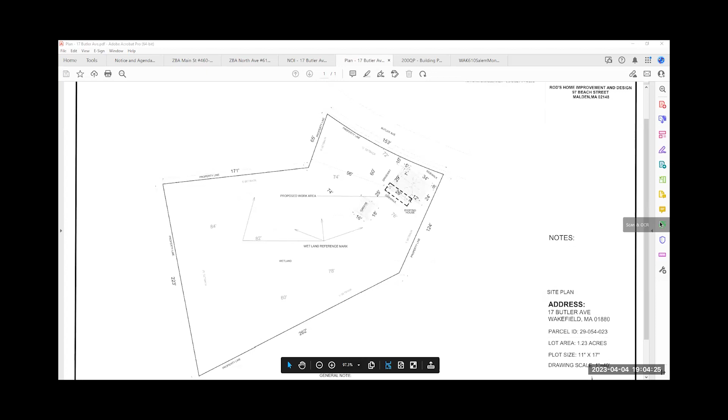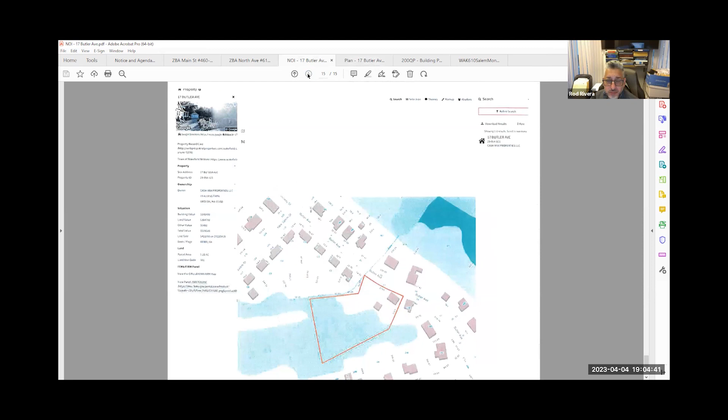It's 7 o'clock right now. I got it on now. That's actually the site plan, not the plans. Those are the pictures. These are all I had. Yeah, those are all that were attached to the application. And I know we noted that none of the plans show the wetlands or the buffer zone.

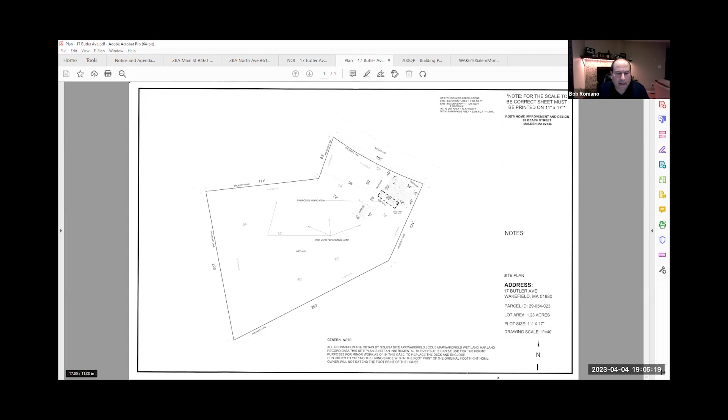All right, yeah, there is a note from Rebecca. The wetlands have not been confirmed by Elaine yet, so it certainly will need to be continued until she can get out there and verify wetlands. Have the wetlands been flagged? No. And they're not shown on the plan either. Okay, I know it's hard to see on that site plan, but I could print out better line weight to show the wetlands.

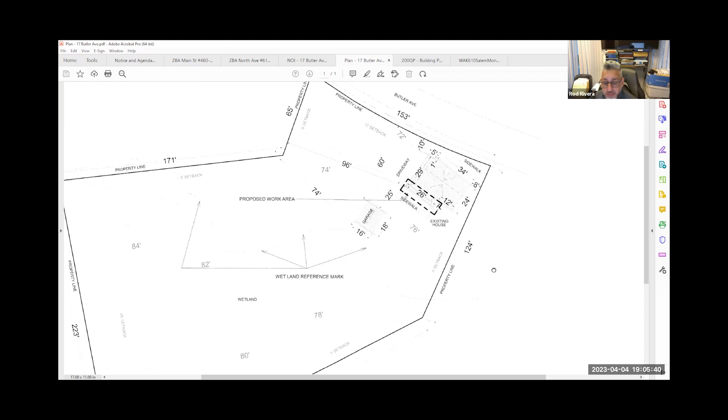Is it on this plan? So anything on the arrow, the longest arrow that looks like a fork, that area right there shows the references. All right, so there's no flags on the property itself, though? No, not right now. Yeah, it's very faint.

So what are you drawing in green? What is the green line? It looks like Ken's tracing the line. The 100 foot? You know, I'm going to tell you, as a minimum, we need to have the resource areas shown on the plan.

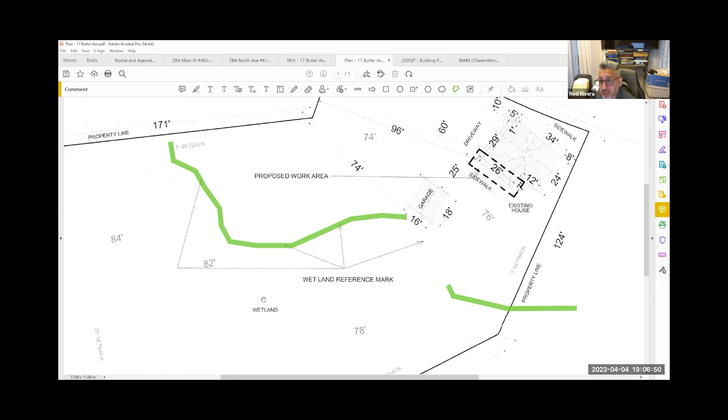I mean, for some reason that PDF file did not show it. If you could even see, the ones I have in person are darker in line weight. But they need to be delineated and certified by someone that's registered to do that type of stuff.

Are you saying the whole other side of the green line is wetland? Yes, anything behind that—where it says wetland down there in the corner, yes, on the bottom, yes.

Am I understanding that you're really not adding anything on, you're staying within the footprint of the house? Yeah, wherever the existing porch was, because it fell apart and rotted so bad that the roof collapsed and damaged the bottom deck. So we decided to just enclose that, rebuild it with the permit, and make it part of the living room inside the house.

Okay, so when you rebuild it, do you have to do anything to the foundation that was there? Unfortunately, anytime you take anything on, it's my responsibility to make sure it's secure and safe, so I'd rather just do the footings.

And the footings in that area will be 4 feet below the frost line. I'm not going any further than that, and it's going to stick out about 6 inches above the ground level.

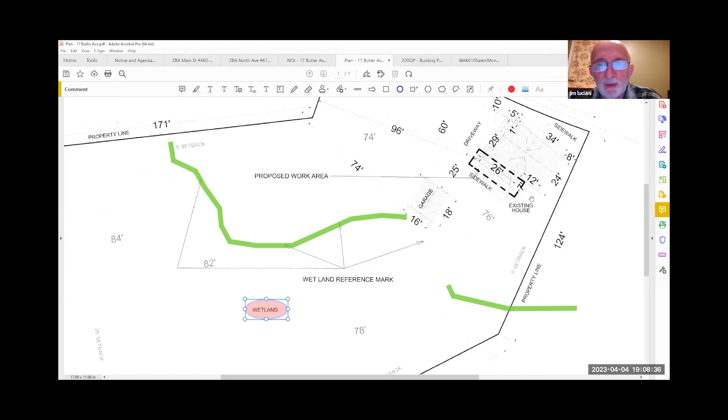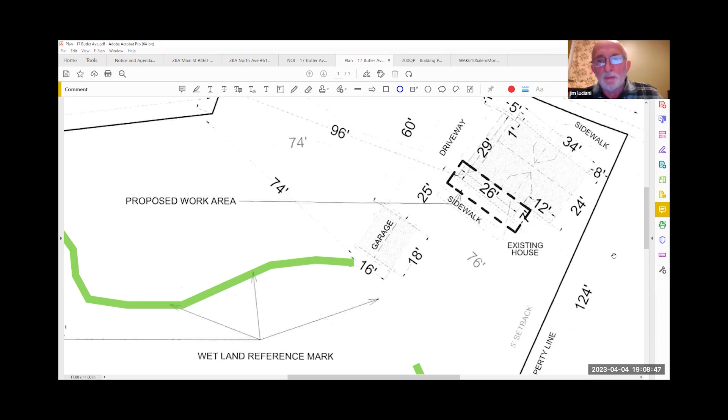The point I'm trying to get at is, potentially if you're staying within the footprint of the existing house, it seems like we should be able to permit something like that without going through a lot of hassle. I would appreciate that, because this house is costing a lot of money to maintain in terms of permitting and carrying costs of the property. We had other ideas, but things didn't work out, so we just want to enclose that area and make it look pretty and finish it inside.

We do have permits for the inside, and about 80% of it is done, except the plumbing and electrical still need some tweaking here and there. We just want to be able to move forward with this and close it and install siding and finish it up.

So is that shaded? Can we just back up for a second? So the only work on the outside you're proposing is replacing the porch - does that impact the footprint in any way? Correct, it's the same exact footprint, other than we're just going to enclose it, so it'll be part of the inside of the living quarters.

Let me ask you this - can you enclose it by putting down piers, or are you putting a foundation wall, or individual piers? Piers. Well if that's all you're doing, really, I don't have a problem myself with allowing that work.

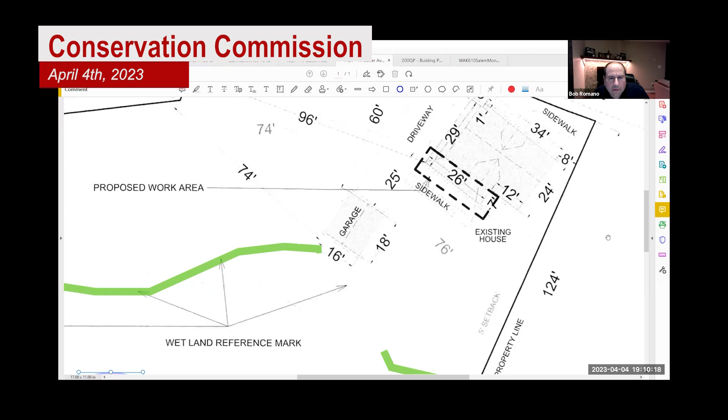So on this drawing, where is the porch? Is it facing the sidewalk? Is that a hatched area right now? That dashed line, that would be the driveway side. The front is actually on the top of the page.

Is what says proposed work area actually the proposed work area? Yes, the dotted line there is the area that we're going to be working on.

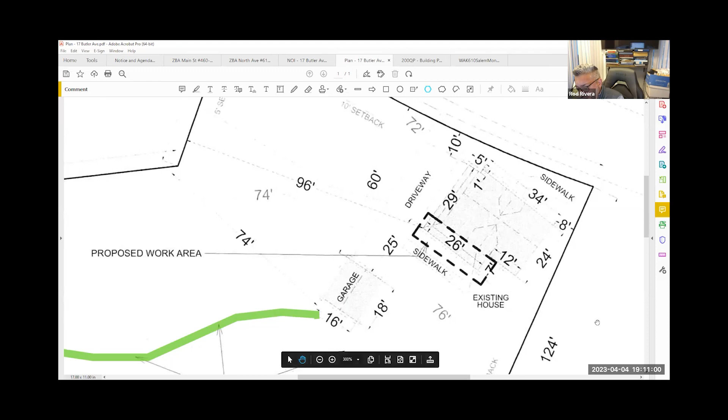Is this close enough to the wetland to actually be in our jurisdiction? Yes, in the buffer - it's got to be within our jurisdiction. I believe they said it had to be 100 feet, and when she scaled it, it was like 50 feet or so.

Ken, can you zoom out a bit - I want to see what Butler Ave is? Okay, top, got it.

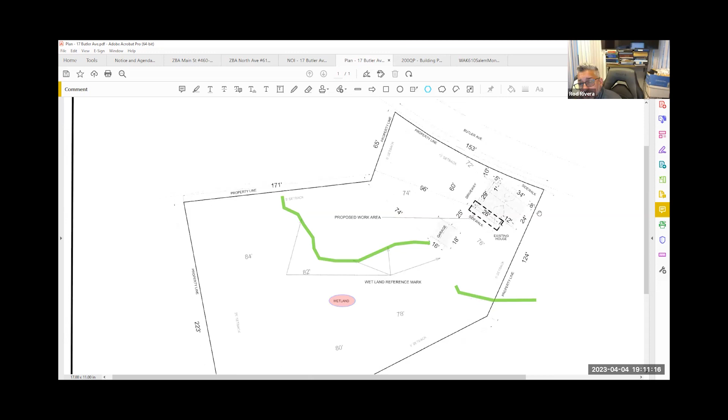So anything in the back is actually the back of the property.

And you're not doing anything to the garage that's there or anything like that, right? That's getting kind of close. So the building department just wants us to clean it up - they're asking to look at it, not mess with it, not increase it, don't do anything else, but give it a little TLC, because it is in bad shape, but it's not, to us, worth it to build a new one.

And you're not changing the grading around the yard or anything, right? Not at all, no.

And this, you filed for this, right? I did, and that's what triggered us coming to you guys, because the building commissioner, who I know very well, said that if we were inside the house it's one thing, but because we're going outside and doing new piers, then we have to go in front of the board for that. Who told you that, Benny? Benjamin, the building inspector, yes, okay.

So we don't have a number for this or anything? No, right, there's no file number yet, so he's going to have to wait for that anyways.

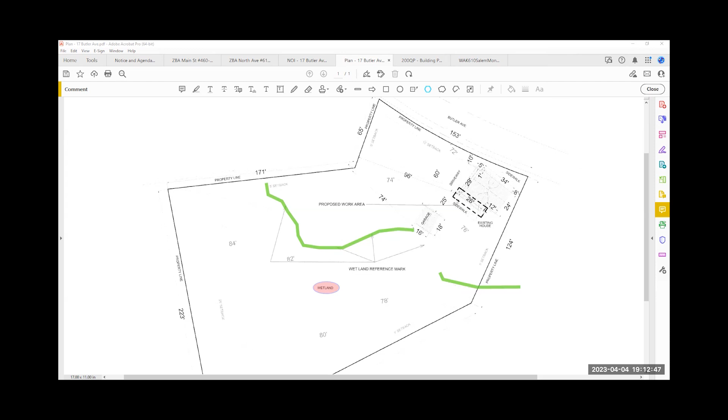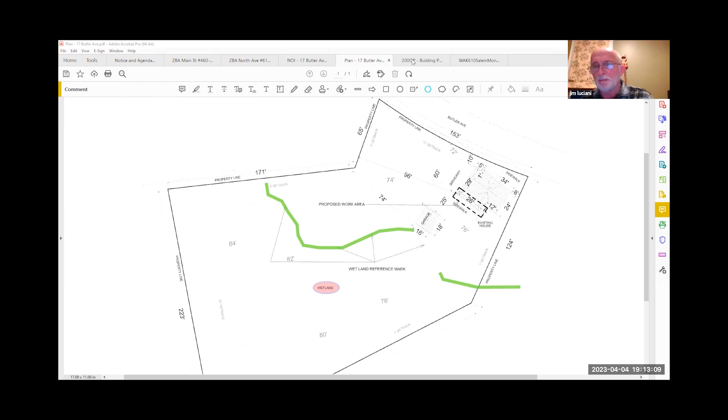We should talk to Rebecca and see what - I don't know if we could - what does everyone think of this? I haven't really, I mean, we could do a site walk. Yeah, maybe we should do that, just to confirm it. Yeah, that's a good idea. We do have more daylight now, so weekdays are in play.

Would you guys like us to be there ourselves? You could be there, yeah, if you want to. What would be a good day?

Could we do, commissioners available next Tuesday? Tuesday during, around - I will be out of town. I'm not around. Tuesday's no good then? No. What day, Jim, I'm sorry? They're talking about Tuesday, but two members cannot make it. I'm not available over the weekend. Well what about Monday, or any other day during the week? Yeah, I could do that, yes. I'll be away until Wednesday afternoon and then I'll be back. Okay, what about - Bob, what day were you thinking? Weekend?

Thursday? Thursday would be okay, me too. Possibly do Thursday. I'm thinking 50-50 maybe, 6 o'clock? Bob, are you around the following weekend or no? Not likely, but it's too early to tell. Yeah, actually, you can't do 6 o'clock, Teresa, right?

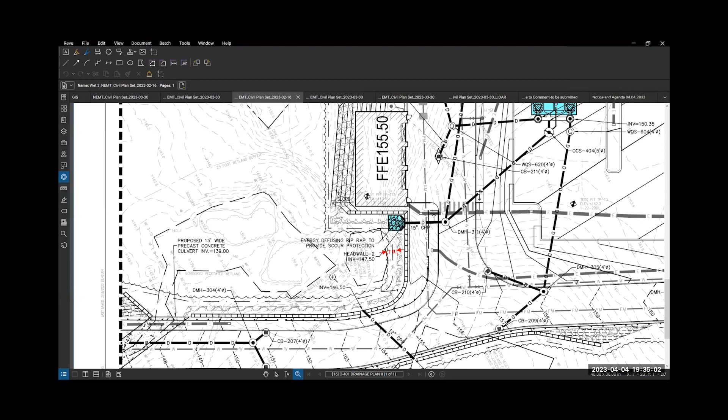So this is the area where there were about 5-6 questions related to how the stormwater was organized over here. This is the old plan, not the one we submitted Thursday, but this is just for reference. What you're looking at here was one large infiltration system, a small detention system, the school, and the maintenance building. If I zoom in, you can see this is wetland 3, and then the non-jurisdictional wetland adjacent to it, and the one outlet for the 2 systems.

In the revised plans, let me just pull those up. I can also do a side-by-side comparison if it's helpful, but for now let me just walk through this. So what you're looking at is a reconfigured driveway area.

With the deletion of the maintenance building, the travel lane and parking have been condensed. This is a non-jurisdictional wetland 3A, where the maintenance building used to be just to the north, and the access drive just to the east. We've pulled that in about 70 feet, condensed the work, and eliminated about a third to almost a half an acre of developed area that we're pulling away and deleting from the project.

The maintenance building, if it is built, would be down on the lower campus. So that was a really big move.

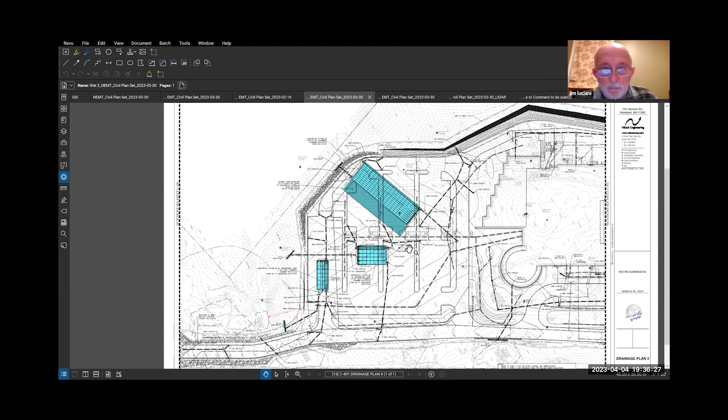That move, the project decided on last week. My teams worked through the weekend, very late into the night throughout this week to make the Thursday deadline for the revised plans. Publicly I'd like to thank them — there was an incredibly large amount of work to do in a short time. It was kind of a big move.

Some of the other below-the-surface moves would be how we reconfigured this infiltration system to address the groundwater comments. This system has been reoriented, and it's also a thinner system, so we're able to move the bottom away from the groundwater. The system volume doesn't match the volume of the system we had previously, so we added another element on the lower campus to make up for that, using smaller chambers with an adjacent clean stone reservoir to give us more volume.

This is another one of the suggestions from the comment letter from the engineering department, again to try to pull back as far as we can from impacts to this wetland. Where we used to have both systems discharging adjacent to the maintenance building, we now have just this one system picking up a limited area of stormwater, outletting in a level spreader upstream, about 25 feet away from the non-jurisdictional wetland. Then these two systems, when they overflow, are directed to an offsite area on adjacent town land.

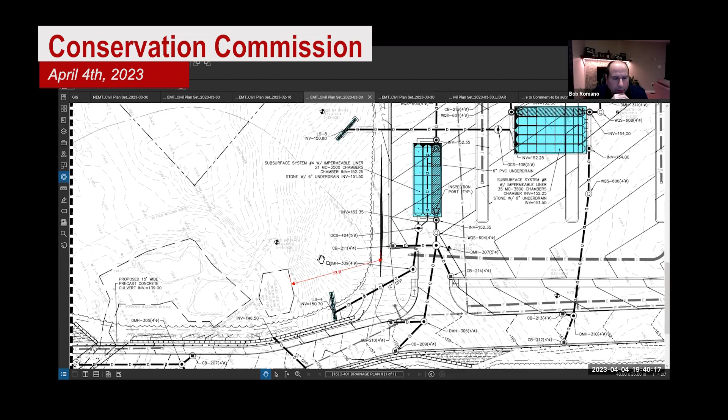Before you move off that plan — could you zoom in on the left-hand side? I just want to see the limit of work line where the maintenance building used to be. Let me do this for you, if it helps, I think this will help — if I can do it right.

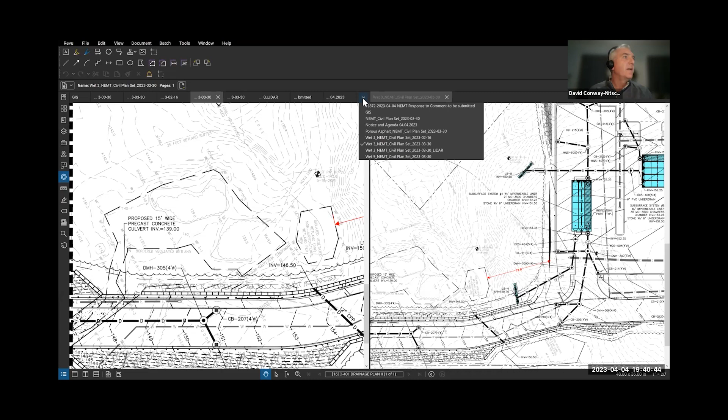So that's what was submitted on the right on Thursday, and this — I get the scales about right — is what was previously proposed. Got it. So here's the maintenance building, you can see the bays, and there's like a little man door here.

So here's the property line. I think you weren't on the site walk, but you had asked us to investigate bringing the roadway through here. We were really close to the adjacent town land — even with deleting it, we just couldn't physically get through with enough space.

So it's a fairly large move. This, I don't want it to be a little deceptive — it scales off a bit from the two, but using the wetlands as a reference point you can definitely see the difference. Yeah, we really pulled back — this number here is 7 feet, and then this number is 73 feet.

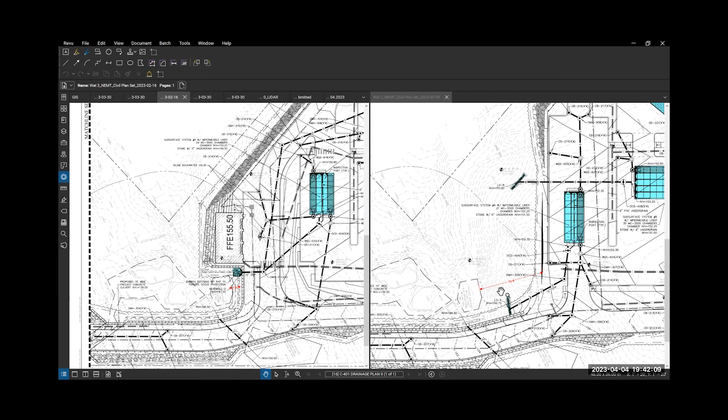May I ask, what's the difference in these outlets here? I see one's like the spreader one, and what is this other one from the original? That's just a flared end, so just a pipe end with crushed stone at the end.

So that was just a pipe discharge through a head wall. And these are level spreaders, which really just meant this to overflow and spread the water out as widely as we can. Okay, and again, you really have to dive into the calcs to understand it, but these outlets for this system were all generally coming out of this one.

Now we have one level spreader for a much smaller area. The subcatchment for this is kind of this parking bay. And then these other two, panning up here, shed it to the north.

So that's my side-by-side comparison. But it was a big move. It's some program elements that the school really needs, but they want to move this along. They want to try to address the concerns we're hearing, and this is a way that it'll make probably life a little bit more difficult on a day-to-day basis for the school, but it's something they're happy to have us work through.

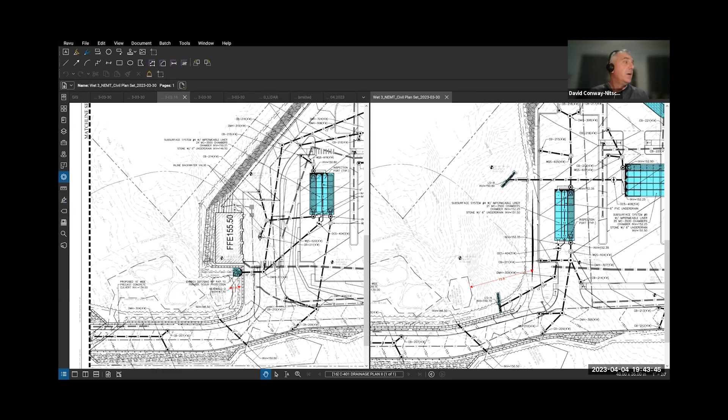So then we talked about the repiping of this. So these landscape areas are now heading down to the campus, and this vernal pool is just being fed by roof runoff. And Paige is on the call. So Paige, have I missed anything in this area before I move down the hill?

Nope, I think that's everything. I think just highlighting that the level spreaders are intended to slow down the flow and have a less erosive effect. So that was why we changed all of the outlets to level spreaders.

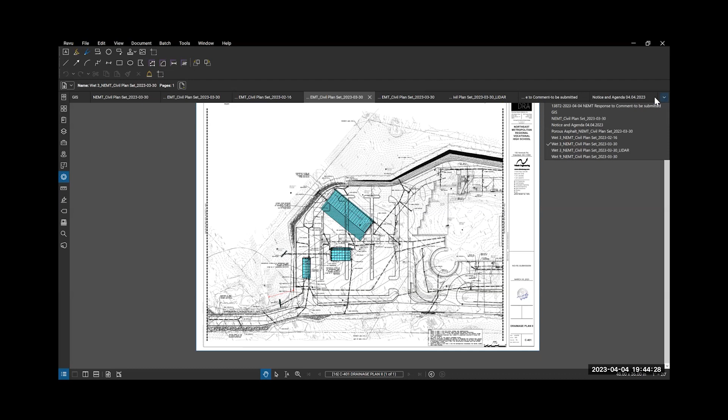And Paige is one of the folks who worked about 80 hours last week to get this done. So I hope you're gonna give her a day off or two, with pay. Yeah, she just came back from vacation, so we owe her some vacation time after this. That's for sure, but yeah, she needs a break from all of us.

She's been a good sport, but also again, just because it's a public realm, some other folks in my office, Ben Root, Winston Lee, all really worked a lot to get this done in time.

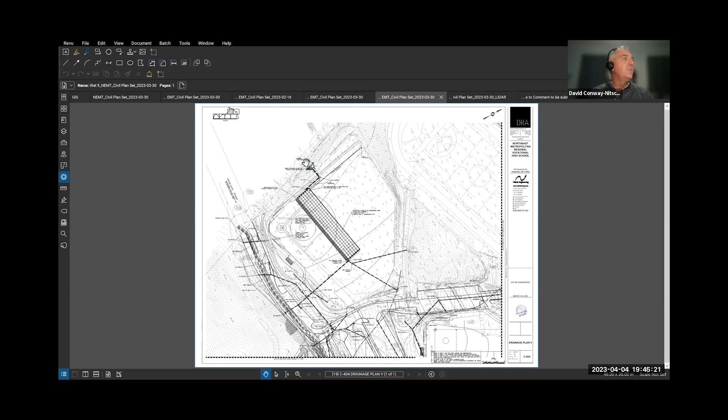This item down here, this change we're looking at, was one Rebecca brought up last week. I'm going to zoom in, and I don't have the before and after for this, but you can kind of see it a little bit here. She asked us if we could pull back this outlet as best we can. Now we have to have an outlet at a certain elevation, but we were able to bring it back.

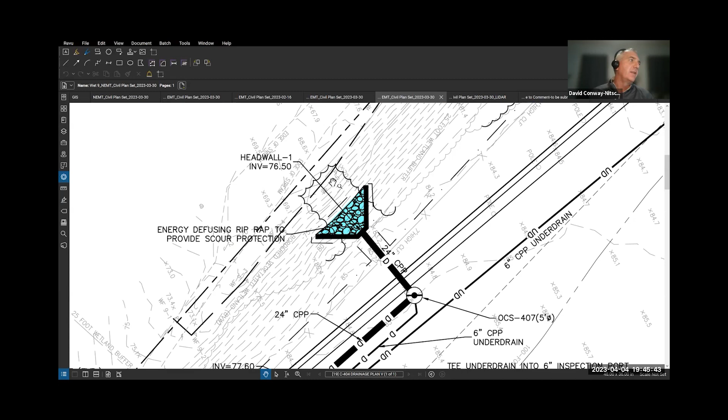This was like the limit of work before maybe the tree line. I think we were outletting pretty close to the wetland, and we were able to bring it back like 17 to 20 feet.

And we investigated other ways of doing it, but this was the spot where we could get it the farthest back. We looked at trying to tie into an existing pipe, things like that. Again, the system up above that we had to install for infiltration has a thinner cross section, so we were looking to make up volume down wherever we could. Again, the site is very rocky, so we have limited places where we can do that.

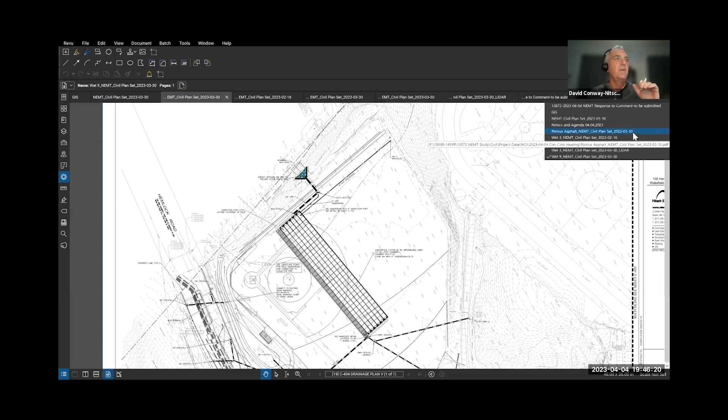This was actually Ben Root's idea from my office, which we thought was a good one, and we implemented it. These lower parking lots are all built in fill, or will be built in fill. And this system here we were already showing, and what we're showing here is basically making this parking area porous pavement.

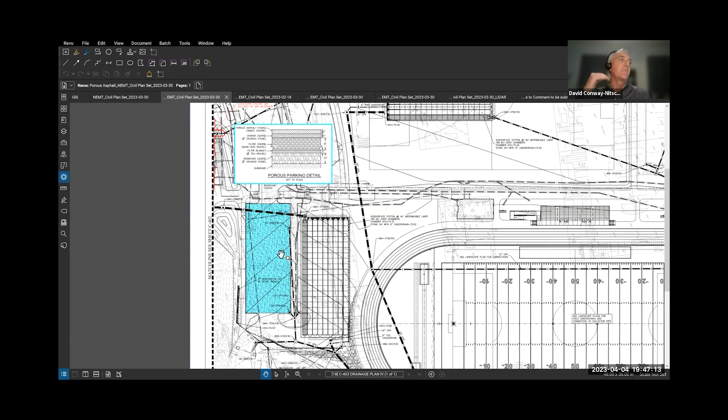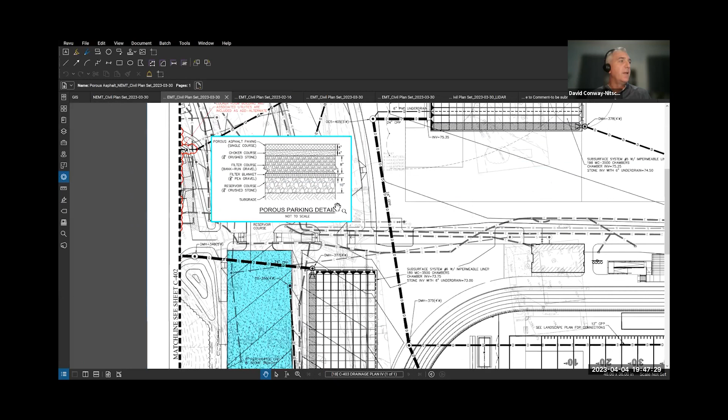Just above, this detail was added to your plans, but we pulled it here just to make it easier to reference for the meeting. We're prohibiting use of sand on the site anyway, so it really wasn't a change for any of this maintenance. And before anyone asks, this is about the only place on the site where we have enough separation. These sections end up being fairly thick, and they have to be over the groundwater above that. So this is 8, 16, 9, ending up being about a 3-foot section minimum just to get your porous pavement in it. And I've used this in a number of applications.

It's something I was first very doubtful of, but we've used it a good amount. There's a lot of studies on it. You get treatment running through it, good separation, plus it obviously reduces rates leaving the site and provides groundwater recharge.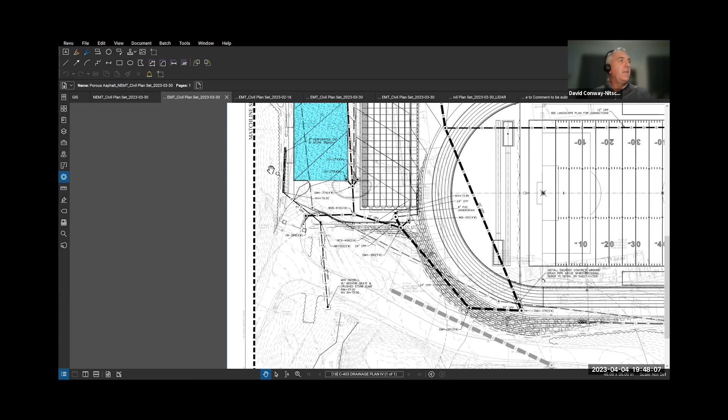Another question that Rebecca had last week, which we looked to investigate - this was actually brought up by the engineering department as well. I don't have the before and after for this, but I can walk you through the changes. This hillside, we're picking up clean water from it, and we want to get that water into the wetlands without mixing it with the other water - just collect it and get it there, keeping it outside of the pavements and things like that. It seemed like a good opportunity to get the water where it wanted to go, where it was nice and where it was treated.

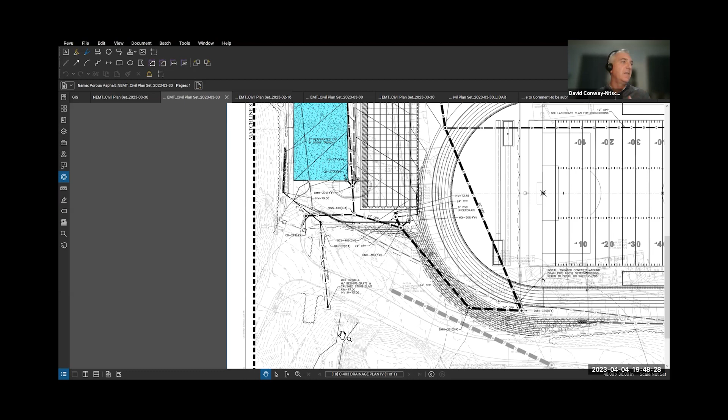I think before we were showing this dry well probably about in this location, and the question was, would we have to blast to get this in to make this work? What we did is we pulled out the old plans from the construction of the school, and this area where we're now showing it is shown to be full fill. So this area can be excavated and this mini dry well can be installed. Again, the mini dry well is really just meant to be an overflow. From most storms, there won't be any overflow - it will just direct the water into the subgrade. But on much larger storms, you might see some flow out of it as it picks up the water and sends it down.

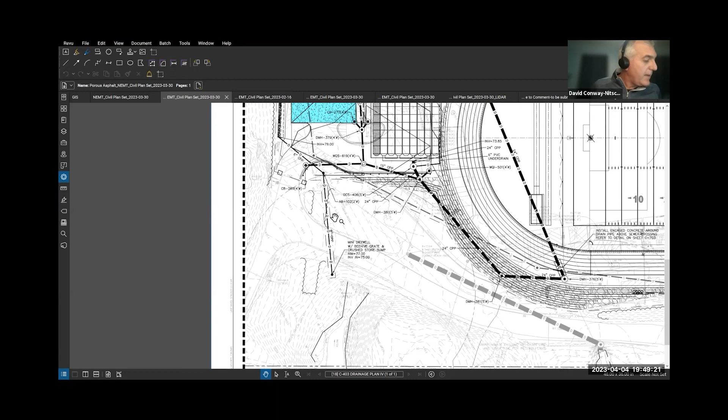We understand that without the stormwater report, and even if we had submitted the stormwater report at noon on Thursday, it's 1,000 pages long. It wasn't really realistic to think your engineering department could, in 2 business days, fully vet and review it. But we're confident with the changes we've made, we're confident with the engineering behind this, and we're looking to actually move this along at this point - or maybe just begin this discussion of moving this along.

We understand it's a large project. We understand at a certain level people would like us to just disappear, but there needs to be a new school up here, and we've worked very hard to address everyone's concerns. Since we first started meeting back in October - we submitted in September - just as a brief recap, because I was kind of reminiscing, some of the changes we've made over that time...

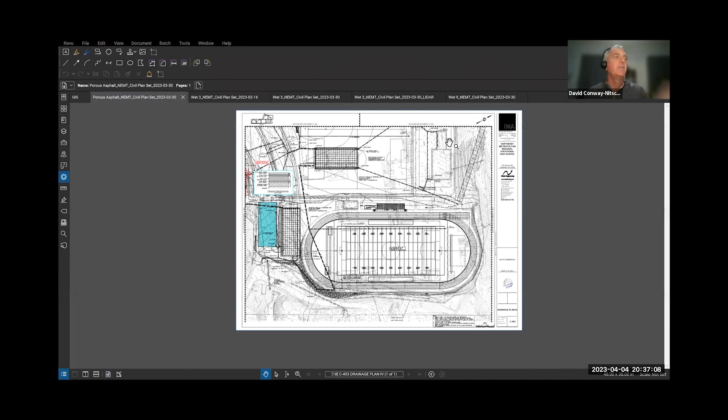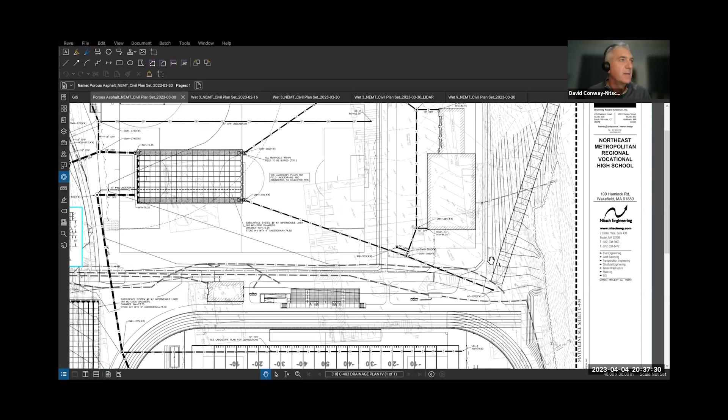So this is the lower campus, and it got tacked on here. Okay, and what's that right next to it, please? This is just another storage building, and then this is a large area here, and out is basically a pavement area. I don't know if people remember, we had tennis courts at one point, but those were deleted from the project. So this is where that happened, I believe, back in the fall - this feature's been here since then. So now we've tacked on the maintenance garage down here.

Oh, okay, so this was where the tennis courts were, and where your cursor is, that's where the maintenance shed is, and immediately adjacent to that is a building, did you say? Yeah, and Kevin can clarify it, but this is basically a storage building or something - or is this something the students would actually be working on?

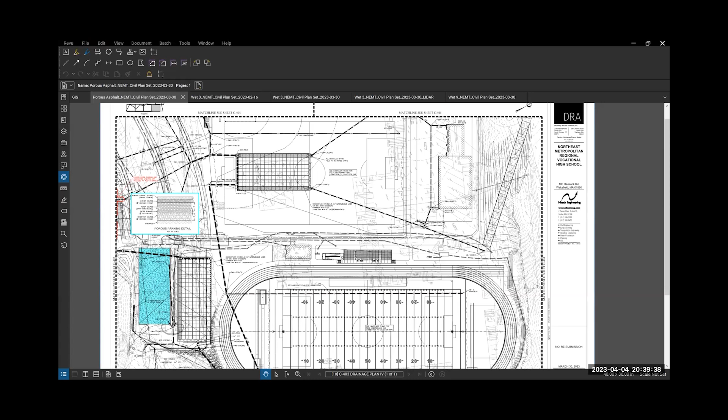Someone mentioned wildlife lighting - could I trouble someone please to ask about the color spectrum you've got there and the nanometers and all that? So we did cover that a number of meetings ago - 3000 degrees, 3000 Kelvin, I think, was what we talked about. I'm sorry, what was that please? Well, we've covered all this before - I don't have all the specifics before us, but we've certainly covered this and have the lighting plan.

Okay, so a specific question would be then, is the light temp, the Kelvin, somewhere in the 560 to 590 range? Can someone answer that question? If we have Warner Larson on tonight - I'm not sure.

But I think David Warner might be out sick. But we can, yeah, no, I do recall it.

We wanted in the 3000 to 3500 Kelvin range, and I think that's what was agreed upon. I defer to your memory. Mr. Chairman, you said Kelvin? Yes, 3000 to 3500 Kelvin. I'd have to go back to the minutes or the lighting plan, but I believe that is what we discussed and agreed upon, and that is where we want it to be.

Okay, do you have nanometers in front of you? No, I don't have any of the information in front of me, I'm just going off of memory. Oh, okay, all right, thank you. And is the lighting plan available that I can go check? It's part of the Dropbox, there's two large sets of plans, one's civil, one's landscape. Okay, thank you very much.

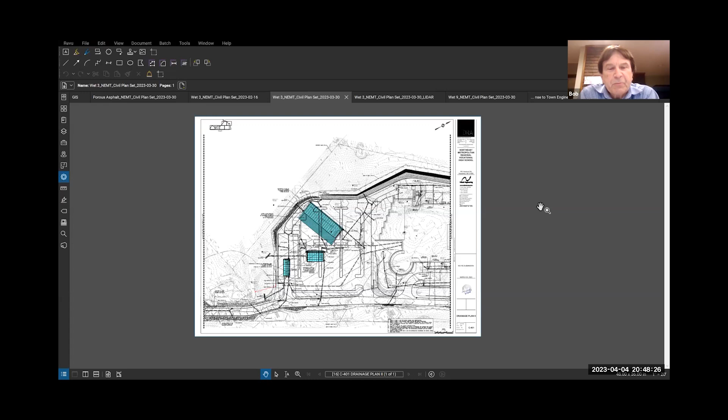As it is now. Correct. Yeah, after. Everyone see my screen? Yep, I can see it. Maybe just a little bit bigger if it's possible. Yep.

Okay, specifically, I would say the top where that stormwater drainage, storage system is, that drainage, correct, thank you. That drains right into that wetlands area that's on Wakefield property, correct? Correct, so the adjacent town land. Okay, Jason, yeah, let's, and so does the bottom one down there? The next one down, the small one? The second one, we'll call it this. Okay, okay.

Because there is a lot of wetlands back there that's on Wakefield town land, and it's in close proximity to my property and my house. Reason why I bring that up is several weeks ago I had Bill Renault and Tim Wilson come over and meet with my neighbor at 4 June Circle, and I'm at 5 June Circle... I'm at 7. She gets more water than I get. We looked at the water that came from Wetlands 1, where it was backed up, almost cresting. And that was during that rainstorm where we got 2.5 inches of water, which wasn't a great storm, but it was substantial.

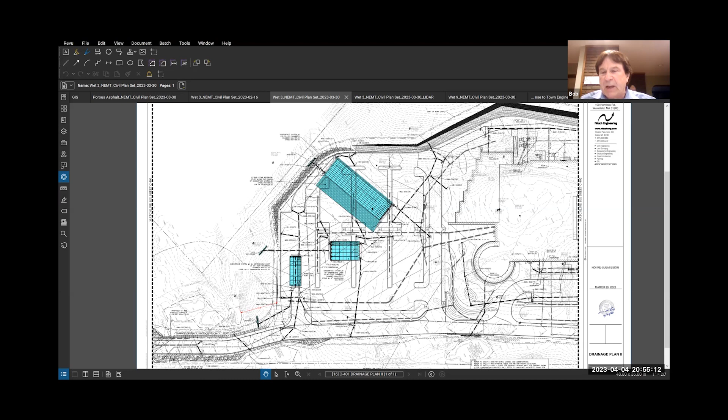No, I understand that. I would calculate it a simple way. If I got 2.5 inches of rain and my pump ran for 4.5 days constantly on and off, and then all of a sudden we get more water coming behind us when it's not raining, or runoff or whatever it may be, and my pump starts running for 7 to 10 days, to me it's an easy calculation. I'm getting more water from somewhere.

Mr. Chair, if I may, this is Julie Barry. What I'd like to point out, and I don't think anybody is prepared to answer these specific questions, particularly since the town engineer hasn't had a chance to review the revised plan yet. But this is showing that the town engineer is aware of this, as is the applicant, and they are both working to make whatever changes they need to the stormwater management plan, so that, as Mr. Wilson said, there's no more water going there than there is now. So this is something being addressed by the engineer and the applicant.

And so when the engineers had, as Mr. Wilson said, they've been out to the site, they've looked at the property. So I think this discussion is more appropriately made after the engineering department has had the opportunity to review the calculations and the revised plans.

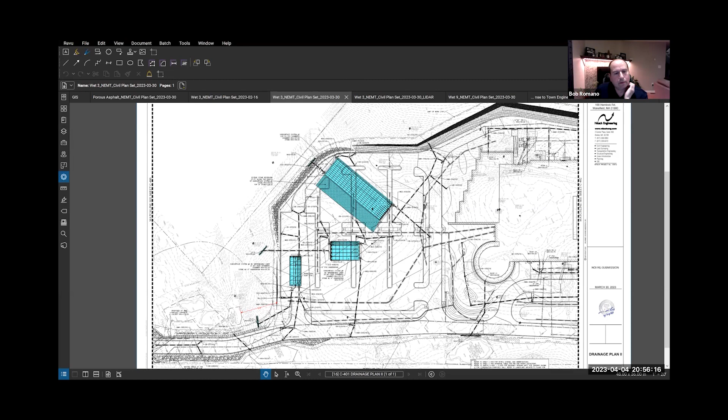I understand that, Ms. Barry, but I only found out about this tonight. That's why I asked the question. And I did say I don't expect an answer tonight, but I'd like to make sure it stays on the radar. Point noted, Bob, definitely. All right, thank you, Mr. Chairman. Yes, thank you.

Let's see, I do see somebody with the initials KJ with their hand raised. Please identify yourself, name and address for the record. I'm Karen Johnson from Malden.

Yes, Karen. I just want to say that for people complaining about the monitoring and testing of the wetlands and pools, this project doesn't have a 1,000-foot buffer, there's not even a 100-foot buffer for wetlands and pools. There's a 0 to 25-foot buffer. So yes, everything is going to impact and probably cause a failure to protect the wetlands. That's all I want to say. The buffer is too little, and I don't know how you're going to prevent the damage, but monitoring would seem to be important. Thanks. Okay, thank you. All right, we'll take one last question.

Sasha, I do see a hand raised. I have one more question, Mr. Chairman. For the town engineer: is the model calibrated or uncalibrated when doing the stormwater assessment? Bill Renault isn't with us tonight, but Tim Wilson is here from the town engineering department.